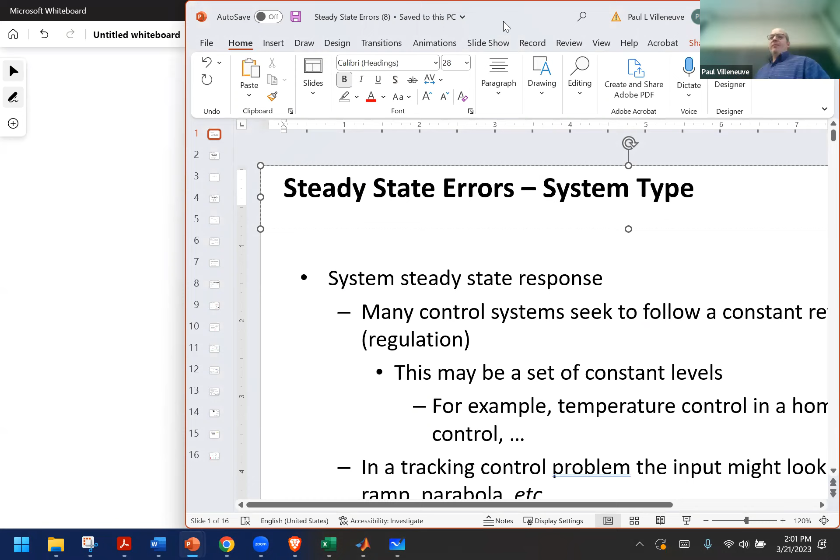Okay, should be available. All right, so any questions before we jump into new material? Everything on the test up to this point is covered, so anything from today forward is new content, new material. So any questions on anything?

I know we've had a boatload of homework. I've been trying to post the solutions, those are all available for the homework that's already due. Does anybody have any issues with that? Everybody hopefully knows where to find them at this point, in the content folder under homework solutions, I believe that's where that all is. The grading for the lab is a little slow, but hopefully we'll pick up and get that going pretty quickly.

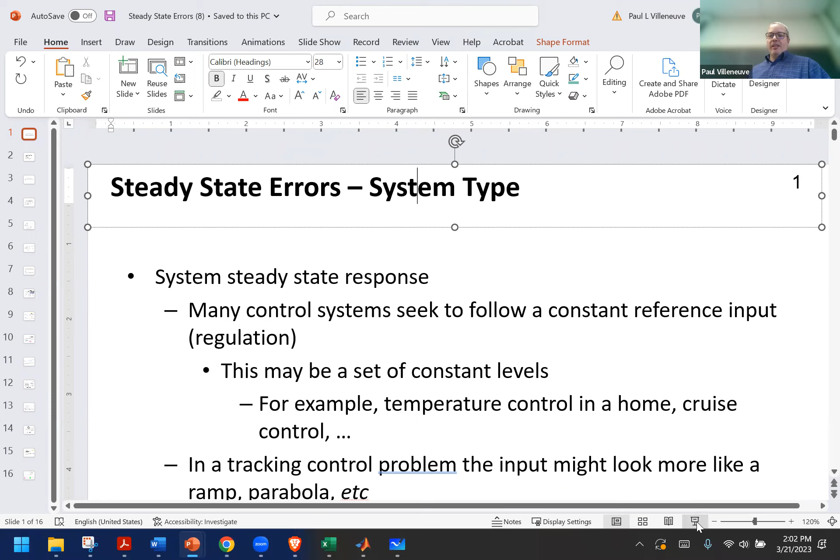So let's talk about steady state errors. Let me get this out of the way. I've said this I don't know how many times in this class, but we live in the time domain, but analyzing systems in the time domain can be quite difficult because we have to solve differential equations. So what we'd like to do is figure out time domain response, time domain expectations, time domain characteristics, whatever phrase you want to use, to get those results but not necessarily work in the time domain. One of the big things we have is our steady state response.

What is our final value going to be? A couple examples I came up with: what if you're coming up with a set point? A set point is what you desire, what you want to achieve. So if I want the temperature in this room to be 70 degrees, I set the thermostat to 70 degrees. There's a closed loop that will tell me if my temperature in the room is approximately 70 degrees. So does everybody understand the concept of deadband?

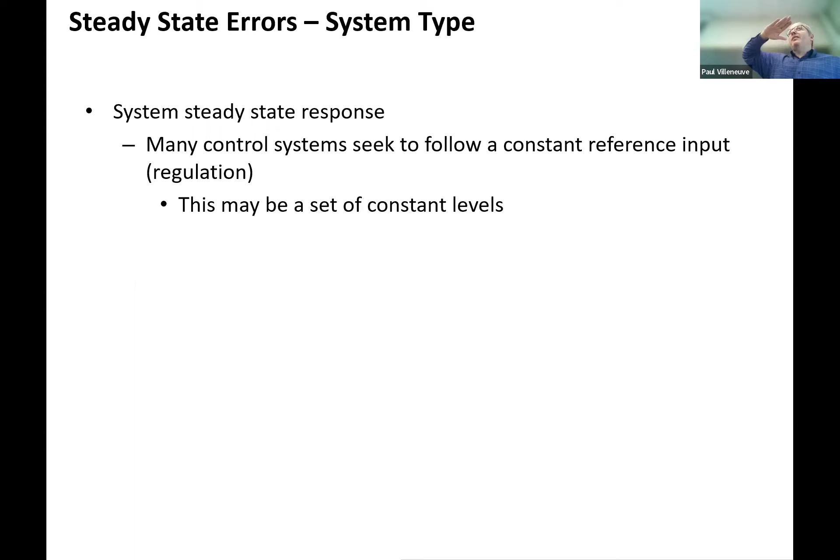You could never really get to a perfect 70-degree room temperature, because once it gets to 70 and shuts off, it's going to cool down and kick back on. So you'd be constantly chattering on, off, on, off. That's not practical. So the concept of deadband is: let's say I want it to be 70 degrees, if it's 70 degrees in the room, the heat could be on or off, we don't know that. So the concept of deadband is I have to know what's happening before that instant in time, if it's within the deadband zone. So 70 degrees is the ideal temperature, or the temperature I want, but the heat may be on or off.

It just depends. If the room was below, let's say my deadband is 2 degrees, if the room was below 69 degrees, the heat kicks on and raises the temperature until it gets to the end of the deadband, which is 71 degrees. Once it gets to 71 degrees, it kicks the heat off, so it goes back down. The temperature starts to drop again until it gets to 69, then it kicks on and goes off. So the deadband concept is the heat could be on or off between 69 and 71 degrees.

You don't know. It's dependent upon the previous state. So a deadband means I could be in either case. I don't know where the term dead comes from. I guess you could be alive or dead, maybe depending on your perspective of things.

The idea is that the concept of deadband is a control characteristic, because there are very few systems that have to be maintained at such a tight tolerance that they can't tolerate some change, especially if it's something that can't be held constant. Temperature is one, chemical properties are another, like alkalinity, especially since we lose or gain heat in this room all the time. So it's harder to control temperature, that's why you have that setup.

But that is a closed loop process, because our thermostat has a dial to indicate the temperature we desire, but we also have the ability to measure the temperature and look at the difference between those two. So we're not going to focus on this deadband concept, we're going to focus on achieving our ideal steady state value.

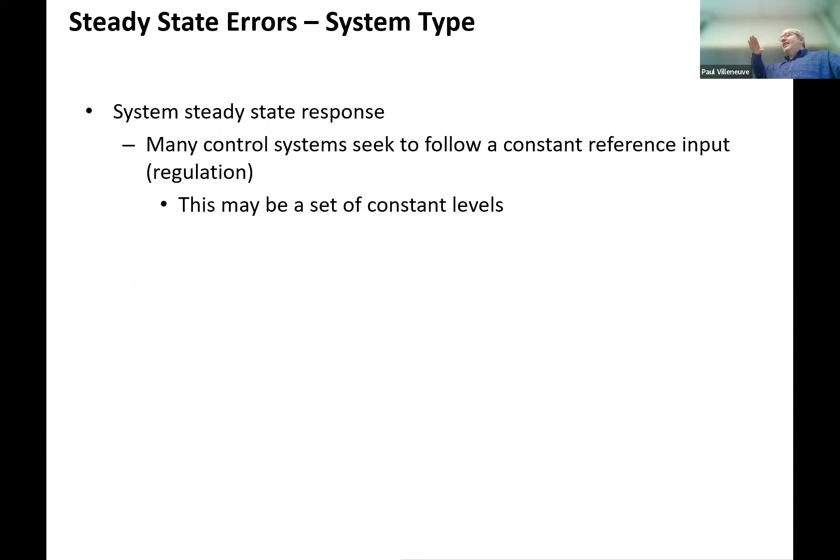Maybe it's a speed, a distance, or a level - any one of those constant levels. Level in a tank is one of the big things, level control in a tank, because we want to maintain that level at, let's say, 60% of nominal, 60% full. So that would be a case where we'd want to monitor as well as have a set point value for that. But that's not necessarily the only case where we have a fixed value.

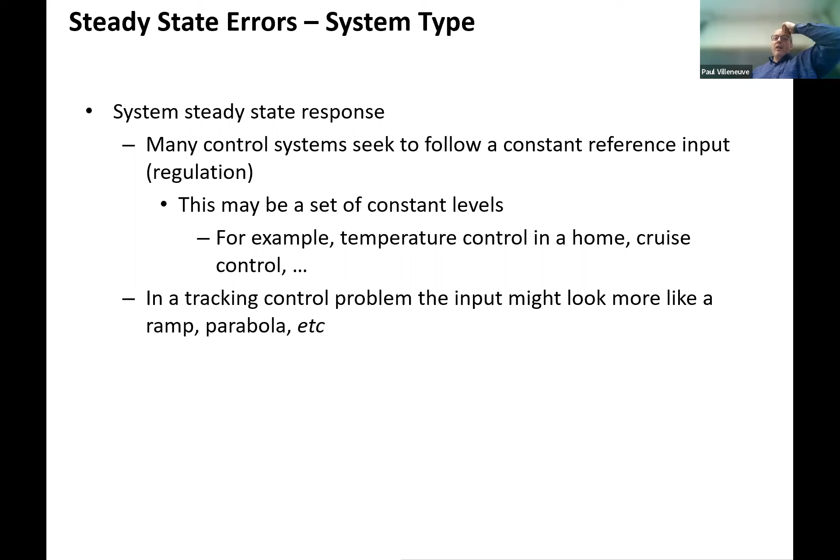Some of the harder ones are tracking. Let's say I want a car to be moving at a certain distance away at a fixed speed. So I can either set the speed, or the distance away will be increasing. If I have a robot, I want it to be 1 foot away, then a second later 2 feet away, 3 feet away, 4 feet, on and on. That would be a ramp characteristic. So I'm ramping my set point input, and my control is making the robot increase the distance that way. Maybe I can't monitor speed for some reason, but I can monitor distance, and at that point I'd be ramping it up.

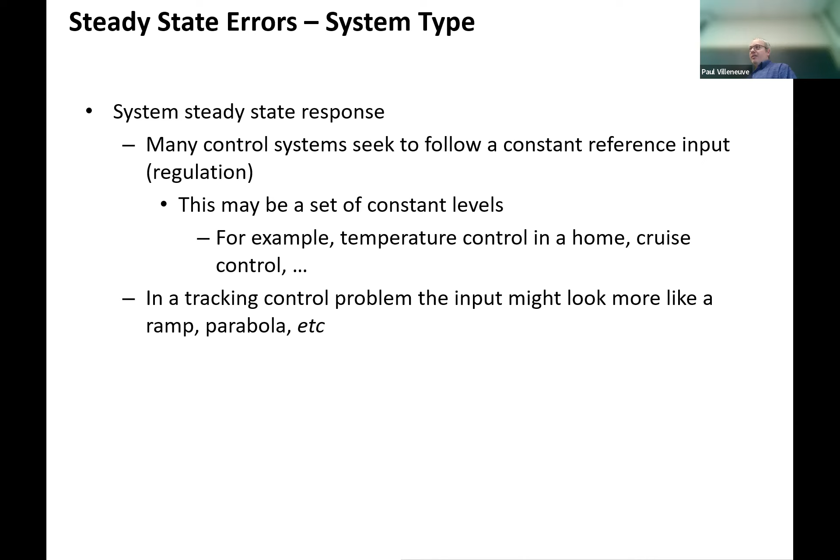Parabolic would be another one. Maybe I'm trying to accelerate something, so I want to continue to accelerate it, and at that point I need to increase it parabolically. That's a less common one, but the idea is that our inputs may not necessarily be a unit step, a unit ramp, or unit parabolic. I would like to have a controller design, or assess what the capability is of my system, by calculating the error for these different types of inputs: step, ramp, parabolic.

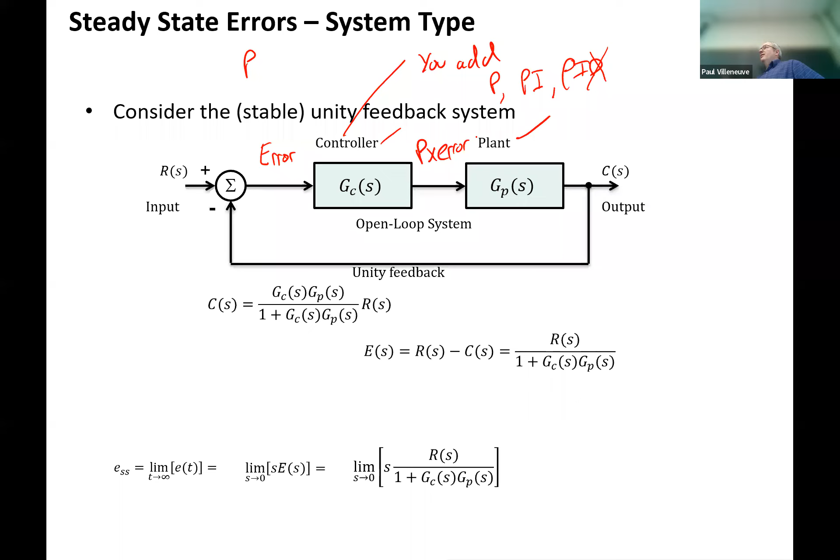So what do you do at that point? You start cheating, which is, I really want the temperature to be 70 degrees, but I only will get 68 degrees if I set it at 70. So what do you do? You turn it to 72 or 73 or 74. So you start kind of cheating your system a little bit to go ahead and get what your desired characteristics are.

And so that's where you get some plant familiarity. You're just the expert at your systems and you know how they function. So you tweak things. Normally this is the value that I want, but I got to dial it back, or I got to dial it up. So that's just becoming more familiar with the system.

So that works, but it is a dangerous precedent, because as we move more and more to digital control, the computers don't necessarily have that capability of remembering, hey, you need to set it 2 degrees above. That's what the operator would do. So you're better off to go ahead and design a system that can reduce that error to 0.

So by adding an integral, right? Remember, if this is my error signal, let's say it's a constant, the integrator here is going to increase until the error drops back down to 0, and then it stays flat.

So an integrator is basically a memory feature. It remembers I need to go ahead and keep that value output. So an integrator will remember that feature and will keep its output after the error has gone away. So you don't need any error with a proportional plus integral control because of that memory feature.

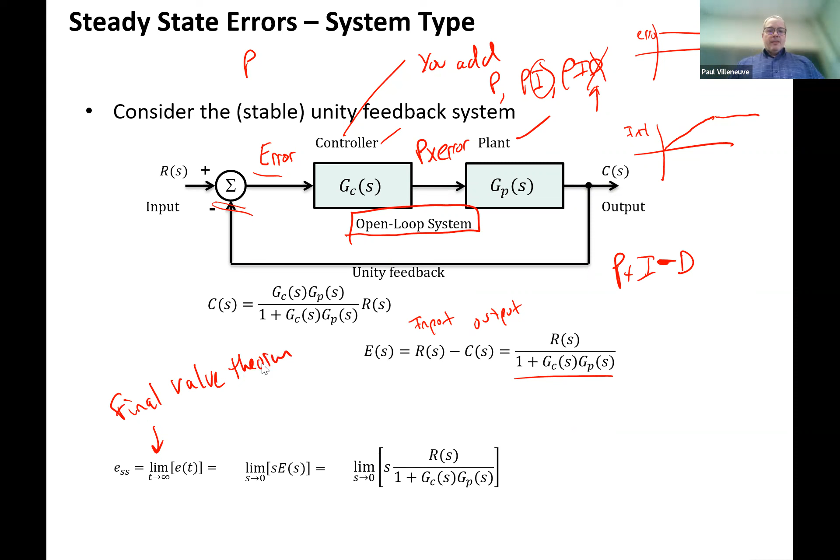Let's check and see if we can bring that up. Final value theorem. I want the final value, so I want to know what the final value of my error is. That's my steady state error. So the final value is a limit as that error function in the time domain, as time approaches infinity. Let's see if I can find it here. That's way more detailed than I want it to be. I just want a simple one. Here we go, right here.

So the final value, f of infinity, is equal to the limit as s approaches 0 times s times f of s. So whatever this function is in the Laplace domain, take my error function, my e of t, convert that into the Laplace domain, that becomes e of s, multiply that by s, and take my limit as s approaches 0, and that's my final value.

Okay, so I'm going to use the final value theorem to go ahead and get there. So here's my... whoops, why isn't this... it's a little slow today.

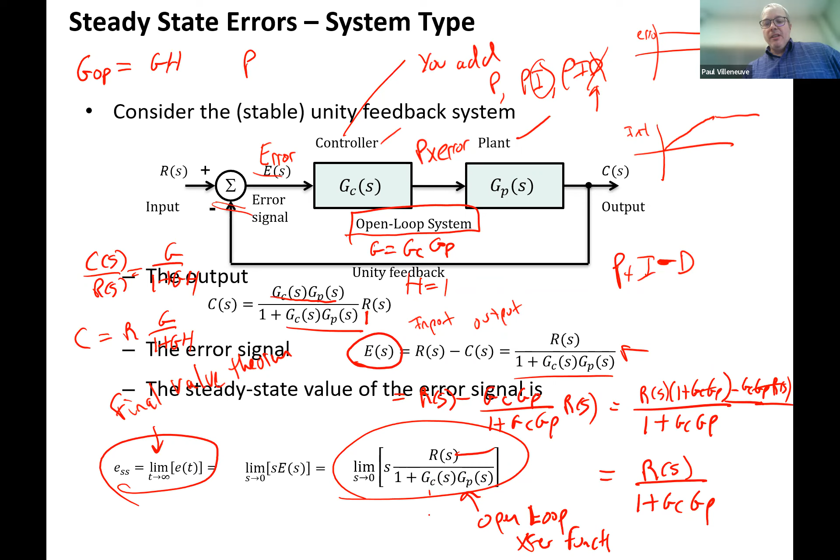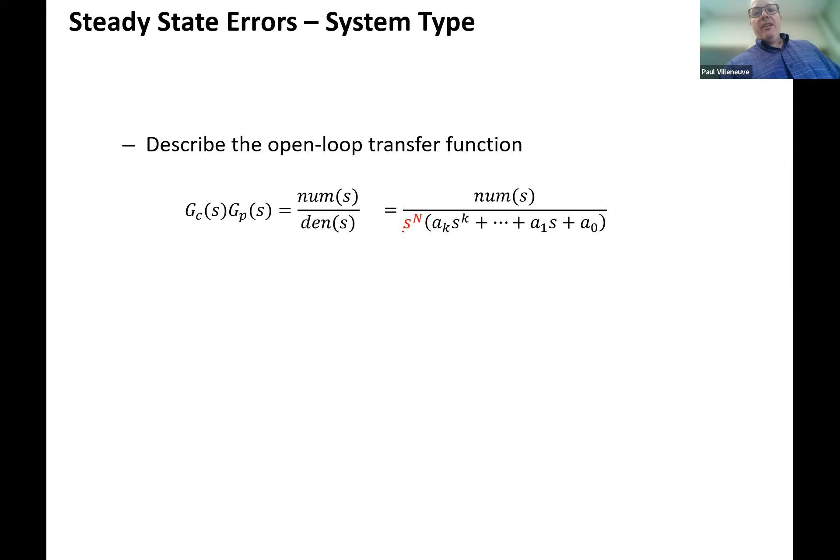Now let's look at how we can focus, because if you remember in our expression here, the only thing from the system that has S terms is right here, this GCGP term. So let's write that generically. It has a numerator and a denominator. I'm really only interested in the denominator, because that's our characteristic equation, and that's what's important to us.

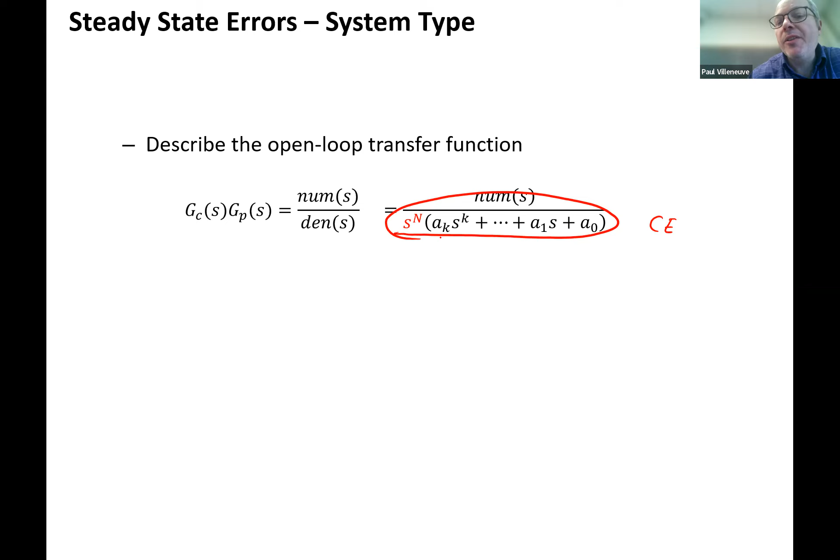So we factored this out so that we have all these coefficients here. We have an a to the 0, and then we have an s multiplier over here. This s to the n is equal to the number of zeros, or poles, I should say, at s equals 0.

It's also another really important thing. Let's look at n is equal to 1. So our numerator function is here, our denominator function is here with all those a's, and then this is s to the 1. Let's rewrite that as a numerator of s, and here's our denominator. But let's pull out over here 1 over s.

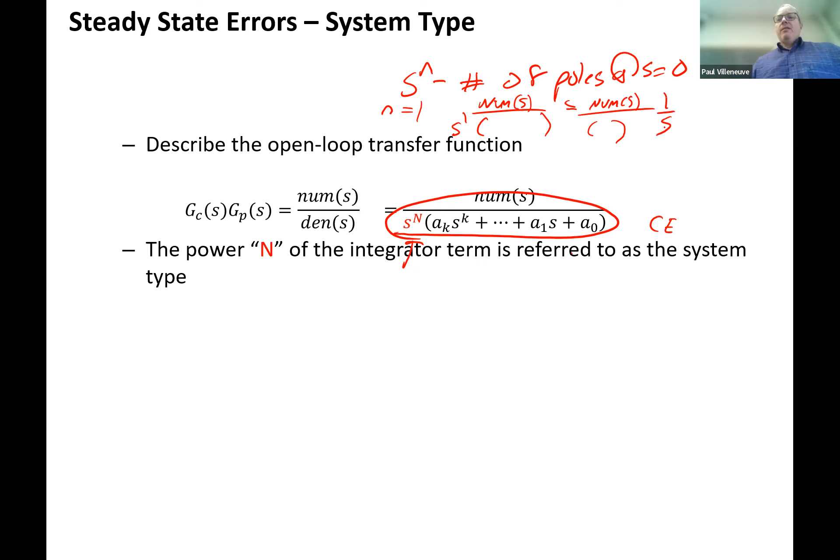What is 1 over s equivalent to in the time domain? Multiplication by 1 over s, that's a mathematical property. No, you're close, begins with an I. Integral. Yeah, 1 over s is an integral, isn't it? And we already talked about, if something has the ability to integrate, it can remember.

So it can take the system to 0. So not only is n the number of poles, but n is also equal to the number of system integrators, and that's so important to us. We say that the system type is equal to n. So if it's a type 1 system, that means it's got one integrator. If it's a type 2 system, it has two integrators. If it's a type 3 system, it has three integrators.

Now, does anybody have a hard time with me saying that a system has integrators? No real world system has an integrator, right? It's just a decaying exponential or sinusoidal waveform. Where do you get the integrators from? I gave you a hint earlier. What did we add into our block diagram? We had two blocks, one was the plant, what was the other one? The controller. So I can add more integration by just modifying my controller.

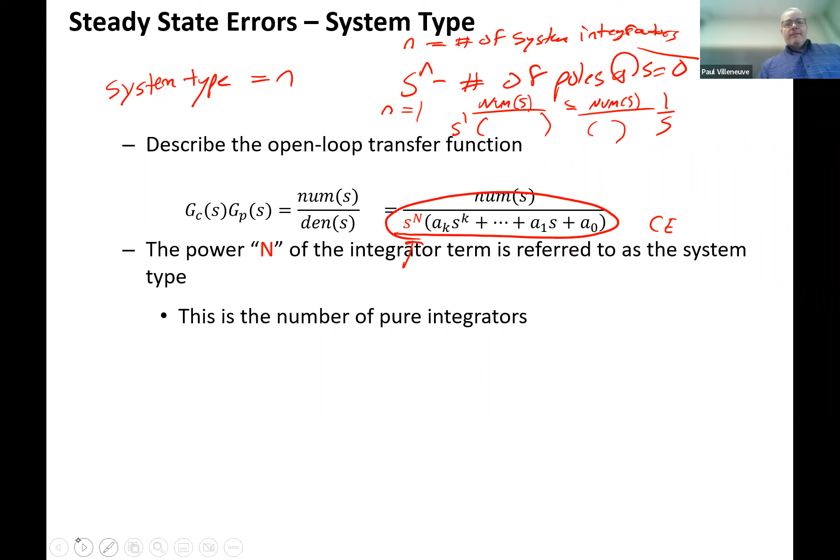So if I'm trying to keep up with a step, I only need one integrator. If I want to keep up with a ramp, I need two integrators. If I want to keep up with a parabolic, I need three integrators. So you get the integrators from the controller, not from the system. So that is a pure integrator, n is our pure integrator term.

Okay, so now let's go ahead and do some cases, because what we're going to do is see if we can simplify that ESS equation a little bit, if we can at all. So let's take the first case where we have an input of a unit step. As Moses said earlier, it's 1 over S. If it has some random multiplier value, like a 12-volt DC input, it becomes A over S. So we're going to plug in our unit step input and convert that to the Laplace domain so that R of S becomes A over S.

Now we're going to take the limit function. So our final value theorem is S times F of S. Here is our S, our F of S is A over S over 1 plus GC GP.

Well, what do you know? Those two will cancel, right?

What about this over here? No S terms in it, right? So I can move this limit over to here because I can change S all day and night, and it's still going to say 1, isn't it? It doesn't go away. It's always going to be 1. So I move my limit function over to my GC and GP, and now I'm going to come up with a new term.

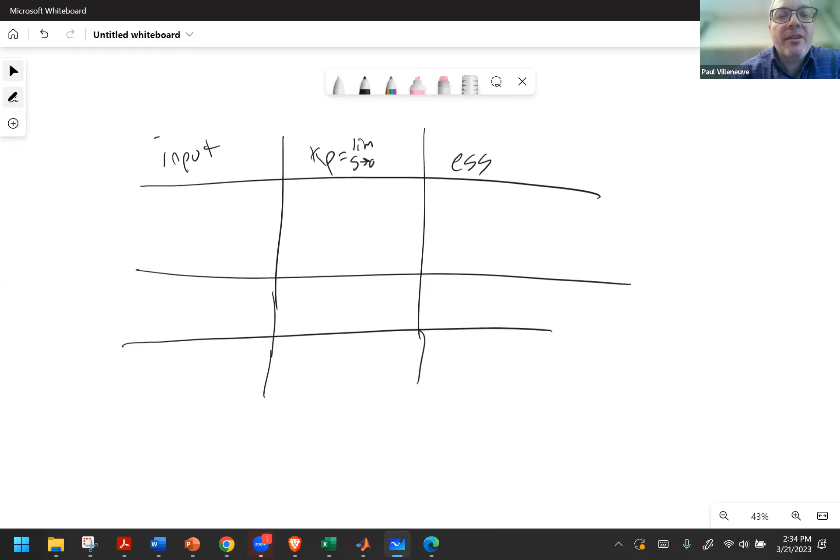GC times GP. My input for a step is going to be equal to—and let me see, do I want to put, and I've got to do a type system too, right? How do I want to do that? Am I trying to put too many dimensions here? I think my system type has to go over here. Let's put this on top. Let's see if this works.

Okay, so for a type 0 system for a step input, my K sub P is going to be equal to my limit as S approaches 0, GC, GP. My steady state error is going to be equal to some value, whatever my unit step input is, over 1 plus K sub P. Let's go to a type 1 system.

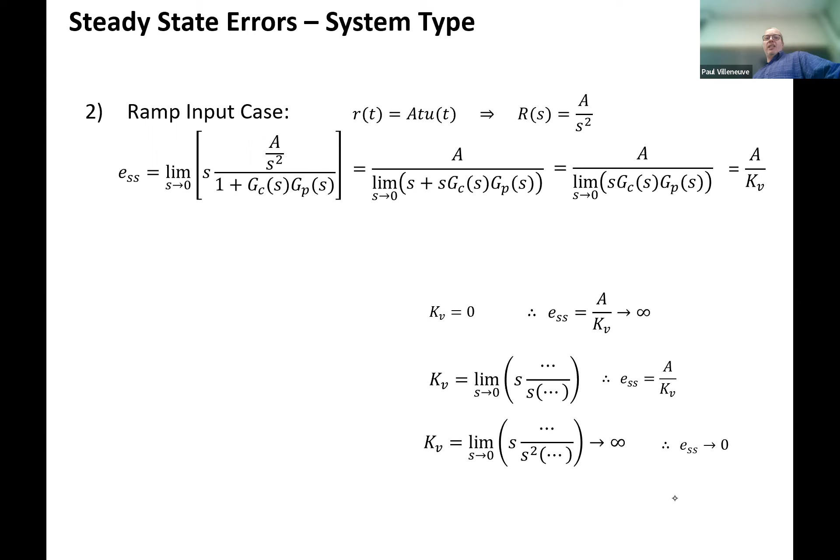Okay, so now let's plug that into our base equation, which is the limit as S approaches 0, S times my input, R of S, over 1 plus GC times GP. If I put my A over S squared in here and distribute it, well the first thing I see is that term goes away and that term becomes just an S, right? That S is multiplying the denominator, so I can move that here and multiply those terms. So that becomes S plus S times GC GP.

Now I'm going to move my limit over here because that's the only term that has any S functions. So I'm going to move it here. What happens to the limit, or what happens when I say limit as S approaches 0, S? What's that equal?

Zero. I'll give you a hint. The easiest way to do this, for me for doing limits, is actually plug in the number. Plug in 0 and see what happens. If you get goofy numbers like infinity, then you got to start looking at it as the number gets really, really small. But for most cases, if you just plug in the number, it usually works its way out, so you don't have to think about it all that hard.

So 0, this term goes away. So all I'm left with is A over the limit S times GC GP. Well, let's take a look at this.

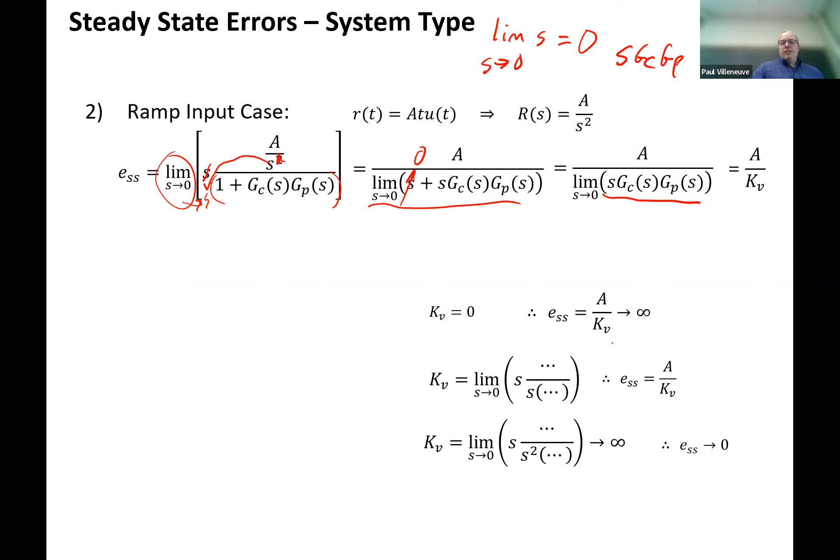SGC GP. Have we ever seen a GC GP term? If we look over here, our K sub P term looks pretty close to it. It's GC GP.

When I multiply S times K sub P, or my position error, and I multiply it by S, what would be another way to say that? Multiply K sub P times S. Multiply the position times S.

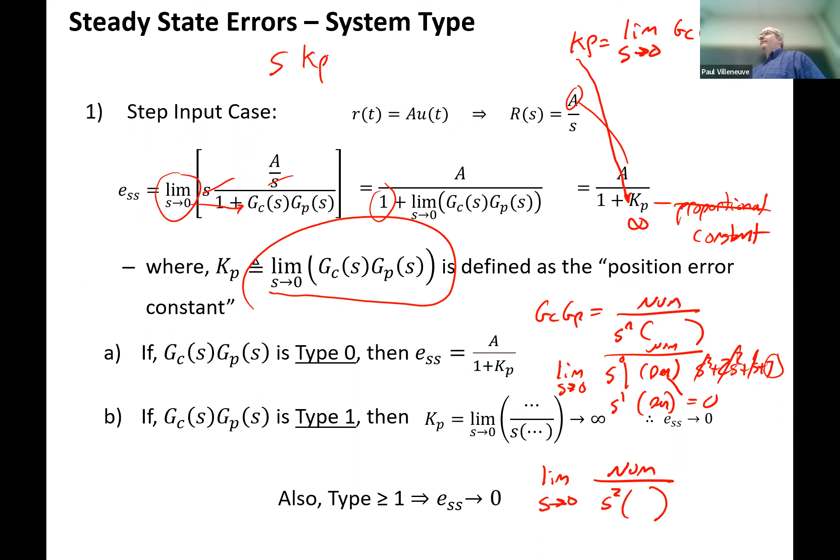What is multiplication by S in the Laplace domain equivalent to? Taking the derivative. If I take the derivative of position, what do I get? Velocity.

So the K sub V. K sub V is my velocity constant, or velocity error constant. Because I'm taking S, taking my position constant, taking the derivative of it by multiplying by S, I get my velocity constant. So I'm going to have K sub V, and here's my expression: S GC GP, it's my velocity error.

Now let's go back to our systems. Let's take a look at this here in the whiteboard. Oh, right here. Oh, it's not awake. Why isn't this moving? Oh, sorry folks, it looks like whiteboard has crashed.

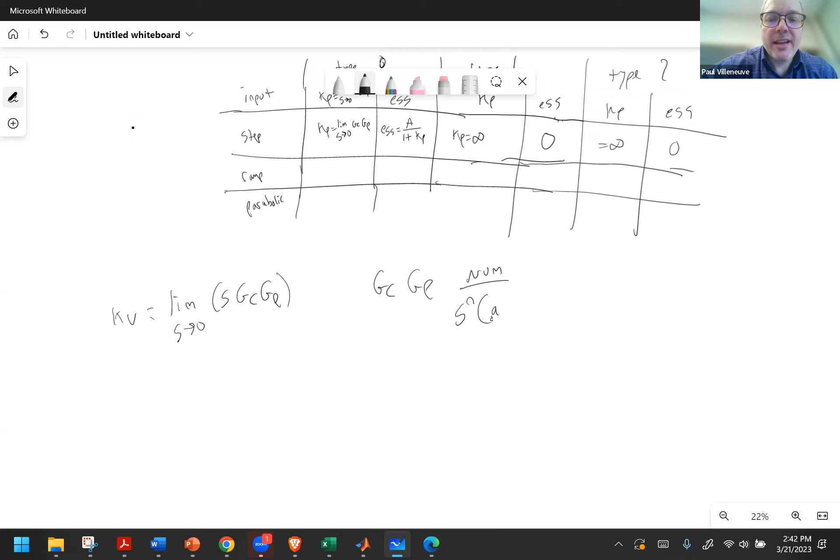All right, so we said K sub V is equal to the limit as S approaches 0 of S GC GP, right? And we already said that GC GP has a numerator over some S to the N times my, well, let's write it out as an expression: A0 S to the N minus 1, etc., all the way down to A to the N, but no S terms.

So let's start off with a type 0 system. For a type 0 system, my GC GP is going to be equal to S to the 0 over A0 S to the N minus 1 all the way down to AN. That's equal to my numerator over, and this becomes a 1, right? S to the 0 is just a 1 term.

So what do we get when we have a type 0 system? We would have a number over A sub N, right? But remember, this is multiplying by S, correct? So for a type 0 system, that's our value, but where we have S multiplying our numerator over S times A0 S to the N minus 1 plus all the way to the N, that's going to be equal to S times my numerator over A to the N, correct?

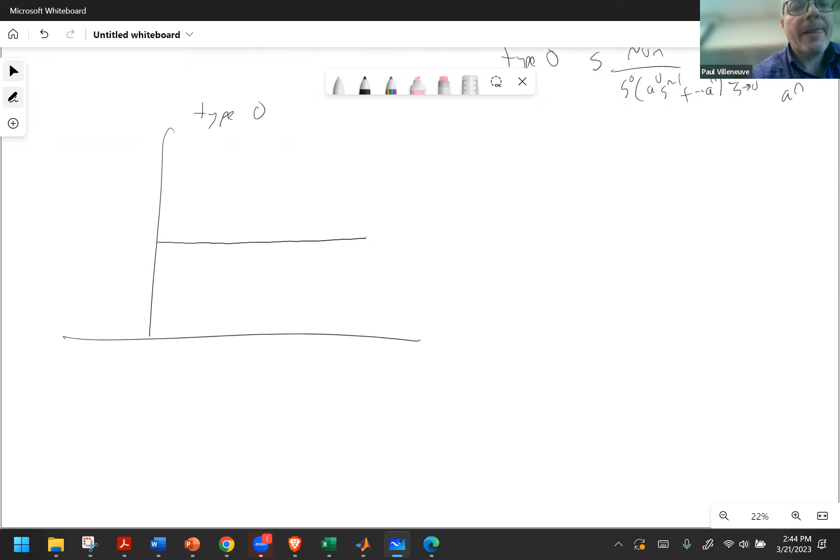If I was to draw that graphically, here's my plot. So if I have an input over here, if I have a type 0 system, I have something like this, right? And then over time, here's my error, E steady state. This is the difference between the two, for a type 0 system.

If it's a type 1 system, I end up doing something like this, and I might overshoot, but eventually it'll balance out, it'll be the same value. So there'll be no steady state error.

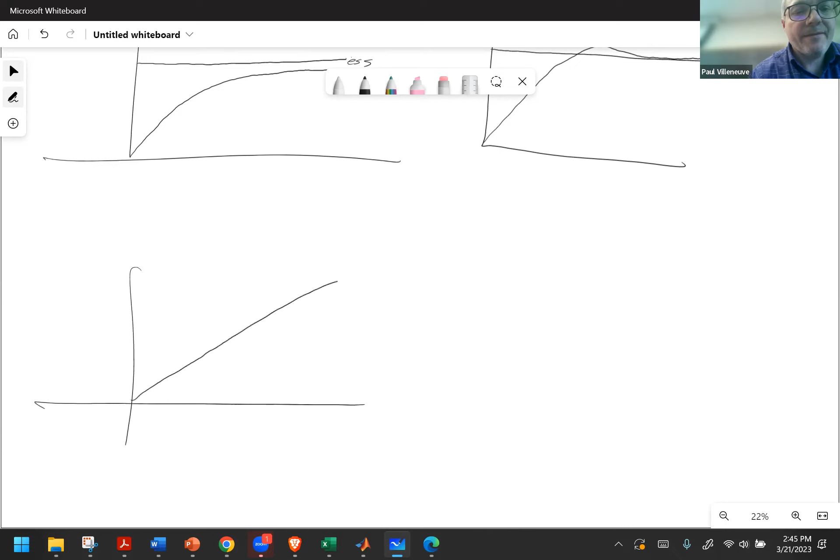Now let's look at the case for a ramp. A ramp is doing this, right? So for a type 0 system, that's not like that — its characteristic doesn't change. So with a type 0 system, as this continues to increase, this stays constant. So the error between those two just continues to grow and grow and grow. That's why the steady state error is infinite, because as time t approaches infinity, that ramp approaches infinity, but the type 0 system just stabilizes out to a value.

But a type 1 system is doing this, and then it's ringing, and it can continue, but it basically will have a constant error between the two.

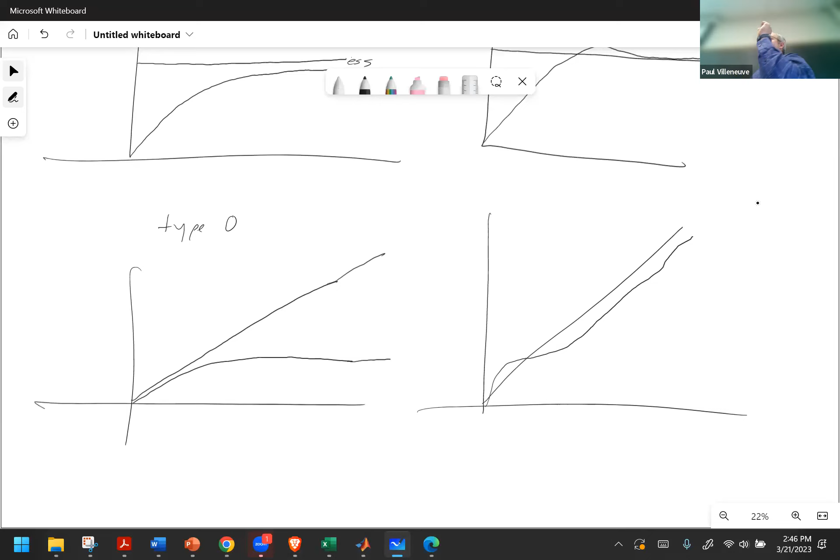So for a type 1 system, we have S to the 1 in our GC/GP term. Those S terms will cancel. Remember that S we had? We just had it in the numerator. As S approached 0, it forced the whole thing to 0. Now that gets canceled out.

And so now what we're left with is we have that A over the A to the N term. That is not a 0 number, so my steady state error is non-zero.

If I go to a type 2 system, this cancels out, and this becomes a 1 as my limit function approaches 0. Anything divided by s as it approaches 0 becomes infinity, so my K sub V term approaches infinity, and my steady state error approaches 0. So for a unit ramp input, I need a type 2 system to get to 0. Let's go back and append to this table.

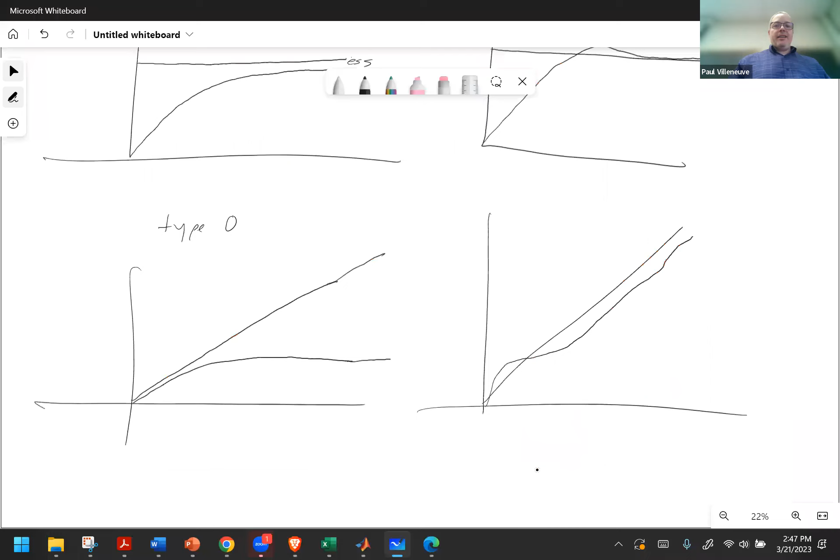Now for a ramp input, I'm not even going to care about K sub P, I'm only interested in K sub V, because K sub P is the position constant, the one I define for a step input. For a ramp, I'm interested in K sub V, which is equal to the limit as s approaches 0 of s, GC, GP. We've already said that's going to be equal to 0. My ESS is equal to A over K sub V, which is equal to infinity.

So for a type 0 system, I'm definitely going to get a value that doesn't work out for me. For a type 1 system, my K sub V term is going to be equal to the limit as s approaches 0 of s, GC, GP. But remember, GC GP has one s in the denominator, so that cancels out, and that's going to be an actual number, equal to GC times GP, all those terms will cancel out. I have no integrators — I should include that here so we don't forget to clear it out. So that is not a 0 now, that is an actual value you have to calculate.

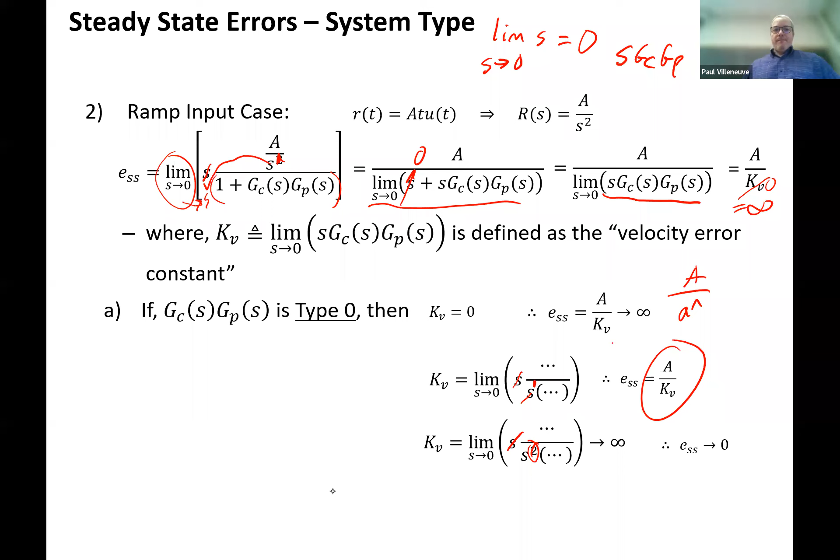Okay, so the last one, which is parabolic. The parabolic is something that is increasing exponentially. So a step input was a constant, a ramp input is the integral. A step is a constant A, a ramp is the integral of a step, which is AT, and a parabolic is the integral of a ramp, which is AT squared.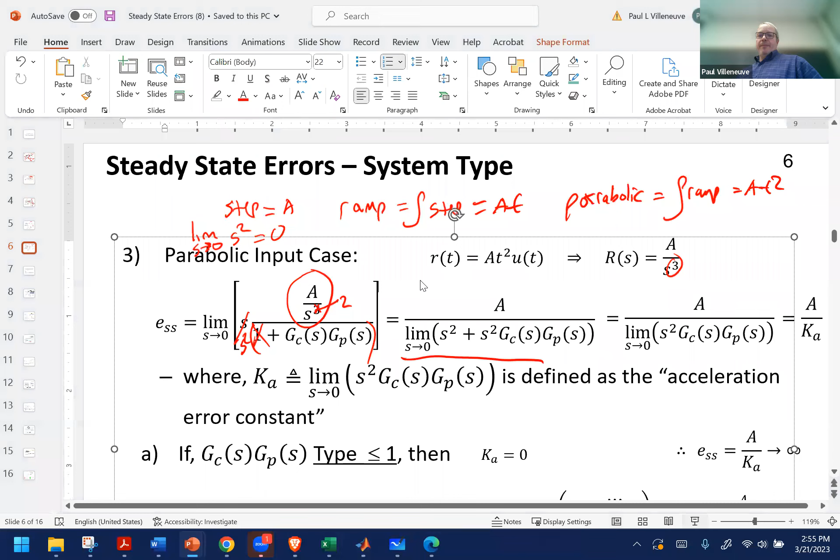Okay, so I just needed to scale it up. There, okay, sorry about the typo. But you can see how the s squared cancels for the first term because of the limit function.

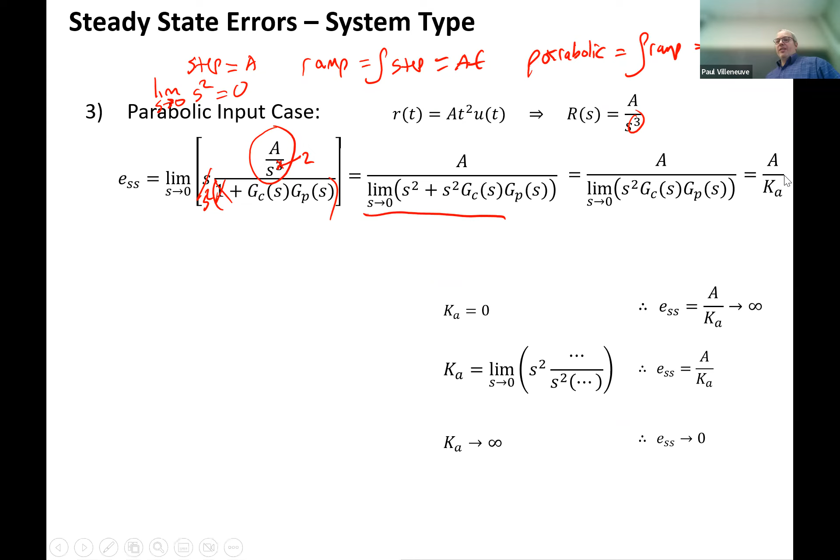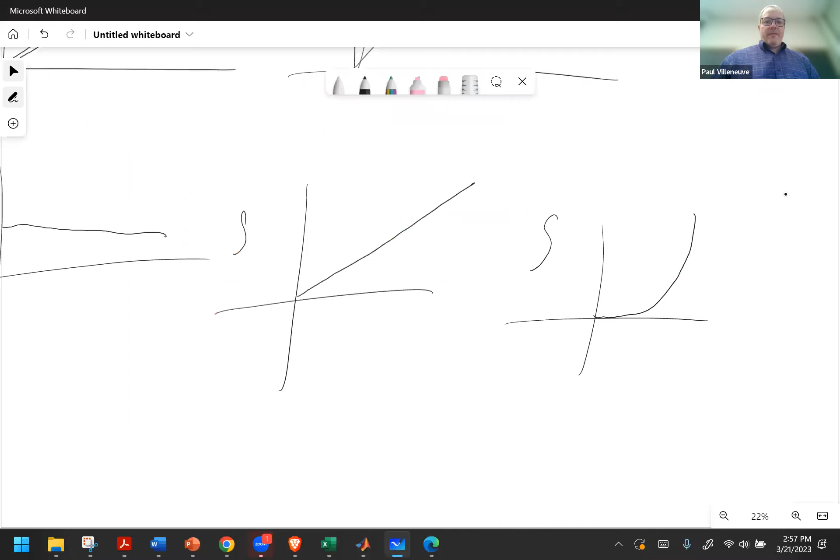So now we have our Ka term, which we're only interested in if our input is a parabolic. For the other terms we don't care about it because we don't have to keep up with it. It's not something that's continuing to accelerate, right? So if you think about it, the position doesn't accelerate, it stays constant, so we're only interested in position. In a ramp, it's continuing to increase its position, so it's got velocity, so we're interested in the velocity constant. In acceleration, or in a parabolic, it's continuing to increase its position, not just the position, but the rate of the position change - that's the acceleration. So we're interested in Ka.

So Ka is equal to the limit as s approaches 0, s squared GC GP. So let's do the type 0 system. Let's do the limit as s approaches 0, s squared, some numerator over s to the 0 times my denominator. Well, this is just a 1.

This term is always going to be equal to 0. Limit as s approaches 0, s squared is always going to be 0, so that makes that term go to 0. So for a type 0 system, this k sub a is going to be equal to 0. My steady state error, which is equal to a over k sub a, is equal to infinity. So for a type 0 system, we have infinite error because we have no integrators to help us.

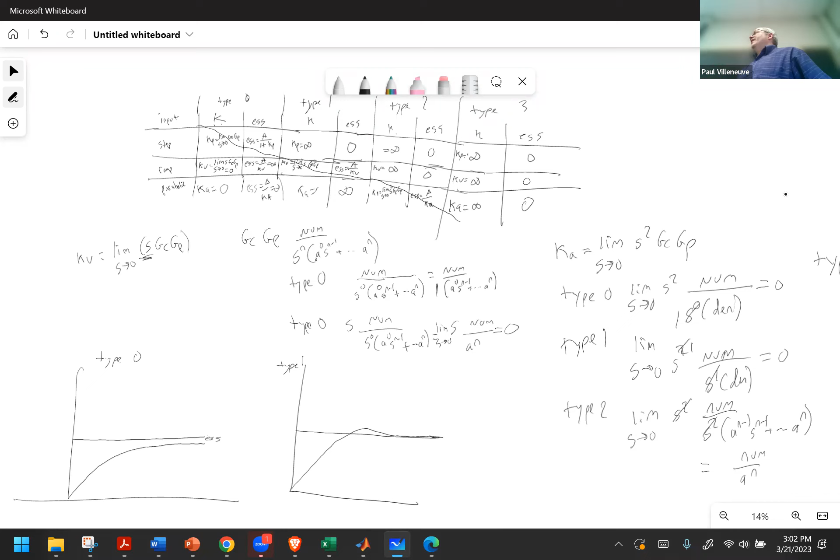Okay, so I'll try to highlight this as best as I can, but you kind of follow the diagonal here. See if I can follow the diagonal. So that's kind of the dividing line. That center line, if that is the system type based on the input, you get values. Anything to the right of that, you get no errors, right? Steady state error 0. Anything to the left of that, you get infinite. And that's how that table divides.

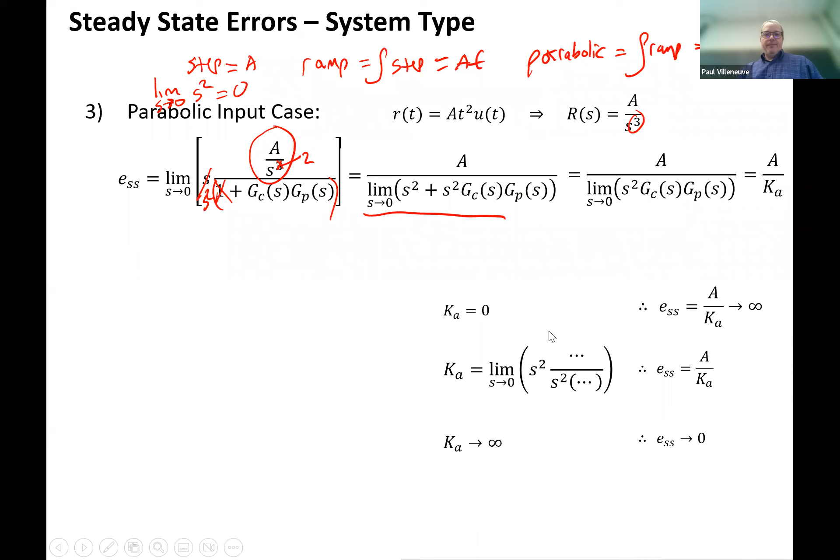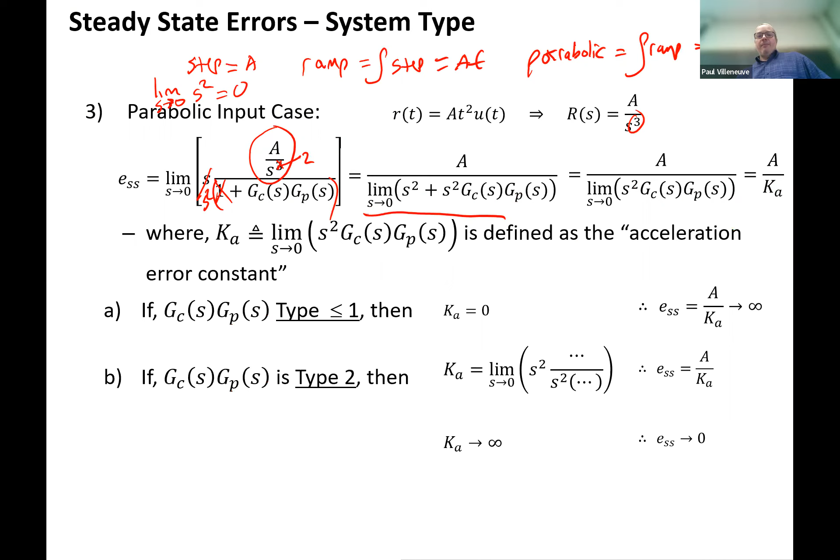All right, we'll finish up with this because I'm drying out rapidly. My lips are on fire.

So we're doing it with the closed loop system. So this is a closed loop system that we're analyzing because the error is closed, but we're actually looking at the system type for the open loop. It's just GC, or the feed forward gain, and the feedback gain. So G closed loop is G over 1 plus GH. G open loop is just equal to GH. So essentially, that is my open loop gain.

All right, if you get confused, I always do my summing junction here. And I just do 1G here, 1H, and then I open loop this. So this is my R, and let's call this my C. So what would be the open loop gain? I can see to get to point C, that's equal to R times GH. So my transfer function for C over R is equal to GH, right? So that's the reason why we call it open loop gain.

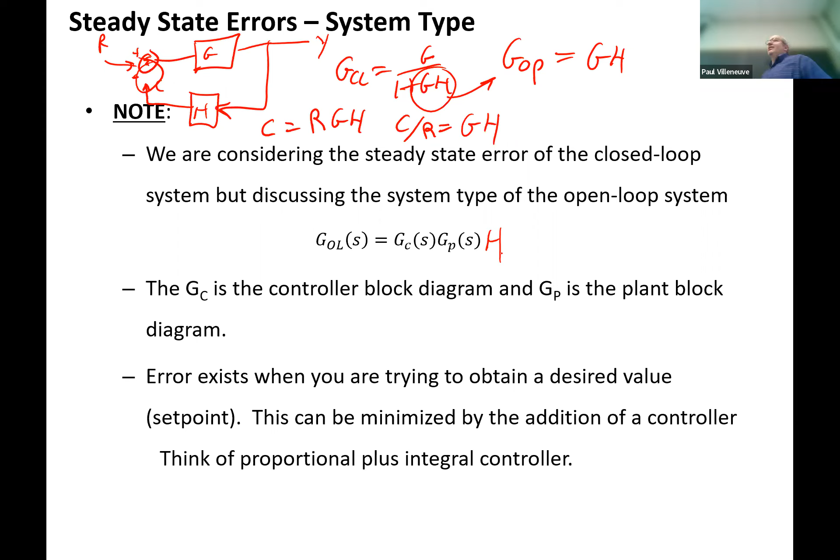The reason why I teach the stuff with the different system types for the different inputs, is because if you look at the FE review manual, it has a table for type 0, type 1, type 2. It has all those and those proportional constants. So it doesn't take a lot of additional work to go ahead and explain the error of the system type stuff.

And let's just look real quick to see. Let's see if we can actually, I don't want to review course. I just want to see the.

Oh, we might have to have a... I don't think I have a login, but I was just looking for the electrical one. I don't want to download anything illegally.

But take a look, if you set up an account, that would be smart for you, because I think all of you are required to take the FE. Go to the exam review material. Let's see, what does this say? Reference handbook. Yeah, you got to buy it, but you can download it for free.

Well, would you feel comfortable sharing your screen? That's what I'm saying, share your screen in Zoom. Oh, you're not in Zoom. Oh yeah, if you want to email it to me, that'd be great. I just don't want to download anything and get anybody in trouble.

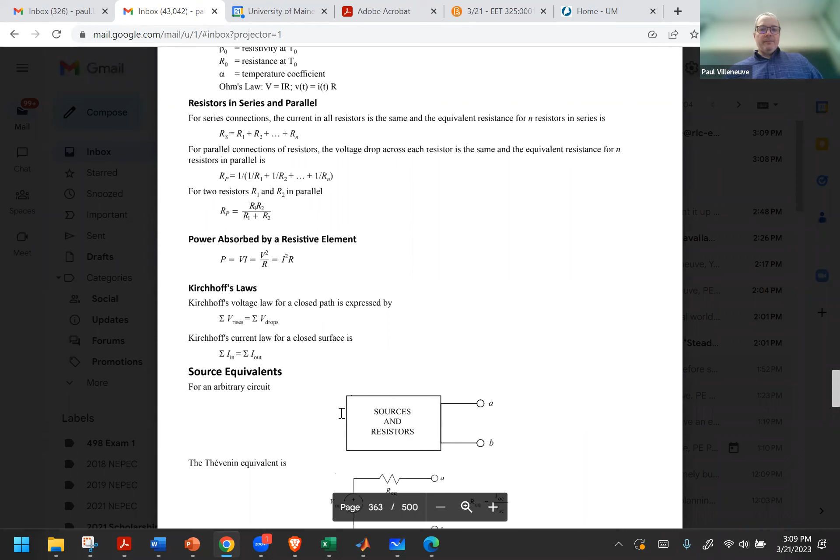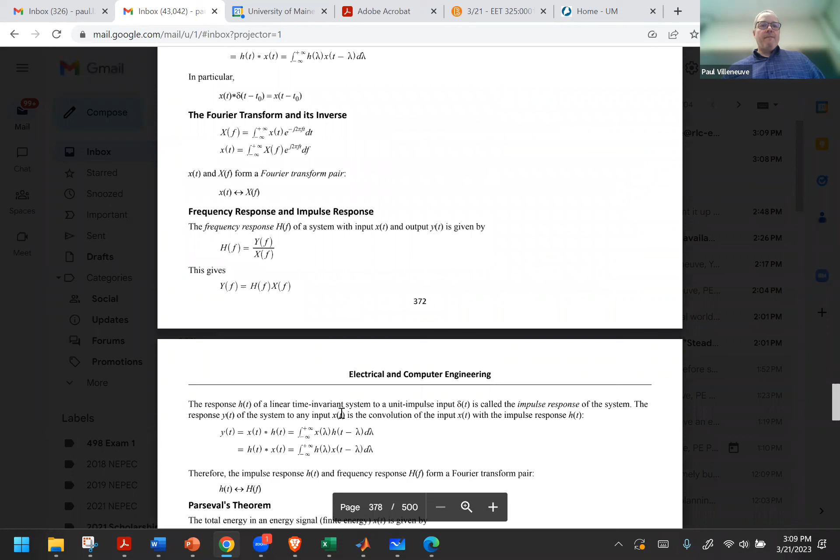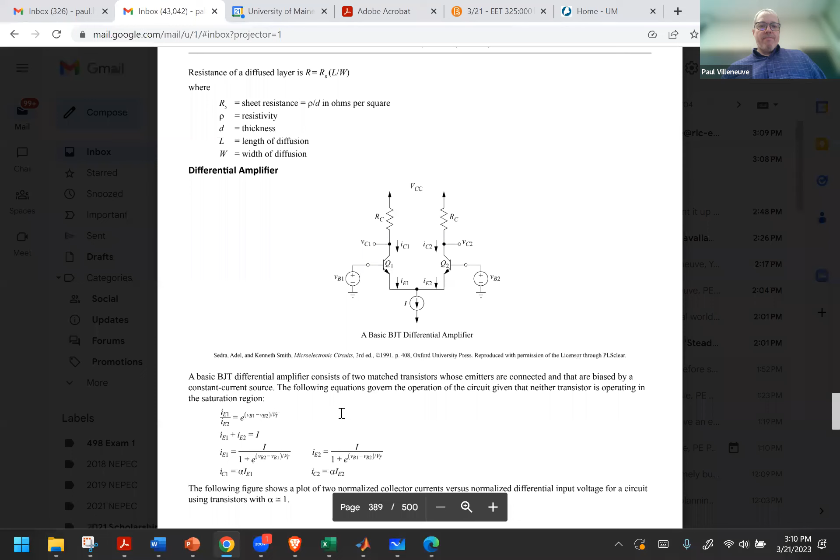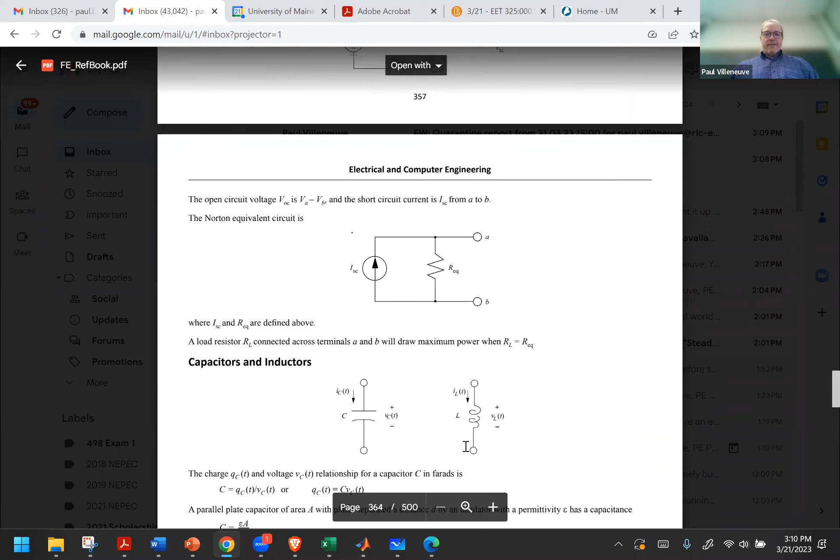Let's look in the controls section. So electrical and computer engineering, voltage regulation. Where's the controls stuff? They used to have just a one, it was like 80 pages or something like that, where. What page is that? 225. Okay, there you go.

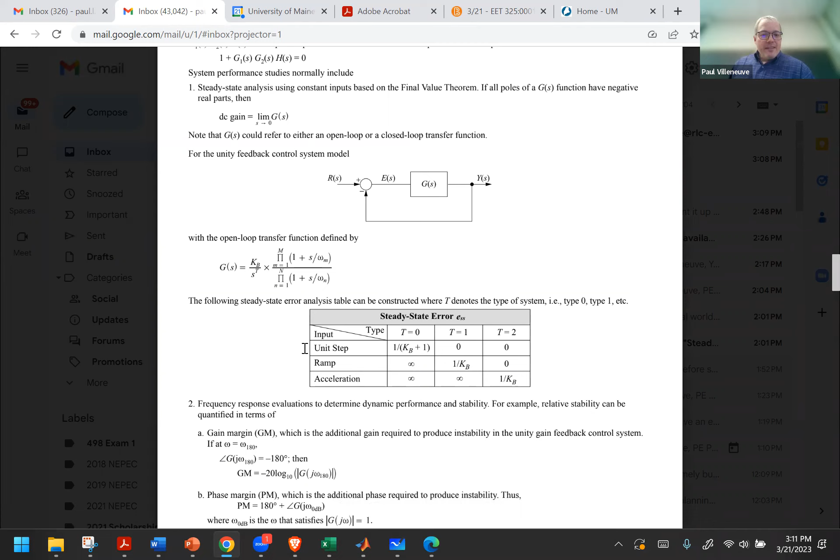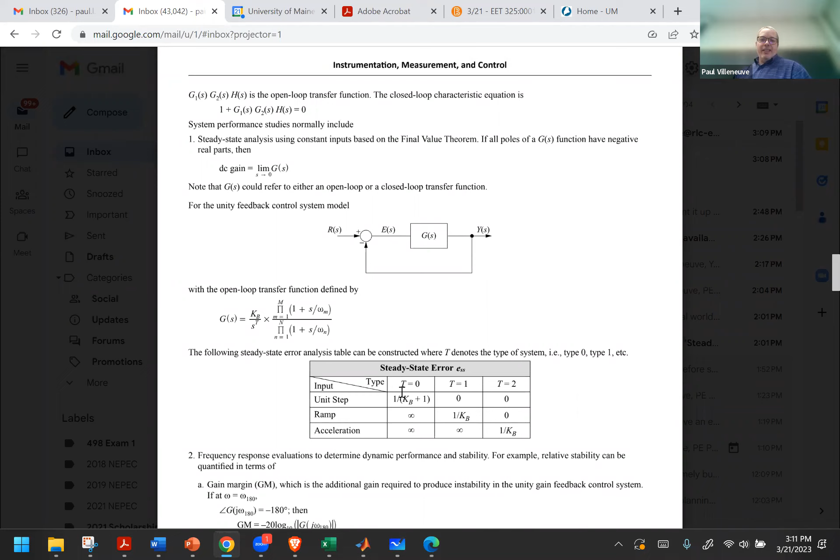So that's the reason why I cover those other systems, because again, in EET we probably won't do it, but you can see unit step, they call it K sub B. The K sub B doesn't appear that they even show you how to calculate that, so unless it's up above here. Yeah, they don't even show you, they just give you K sub B. So K sub B for that. So they're missing a little bit of information, but you can see system type 0, 1, 2. If you go on and on, you just put zeros here. But unit step, ramp, or parabolic, this is not K sub B. That's the limit as S approaches 0, S squared GC GP. This is the limit as S approaches 0, S times GC GP. In this K sub B, this is a different value. So they're missing some information, but that's the reason why we just put the other systems in there, because if you can do this really quickly, this is 4 or 5 points, pretty easy on the FE. It's a pretty simple question.

Okay, well thanks for sharing that, Moses, and thanks for trying to share that, Mort. Any questions? Yep.

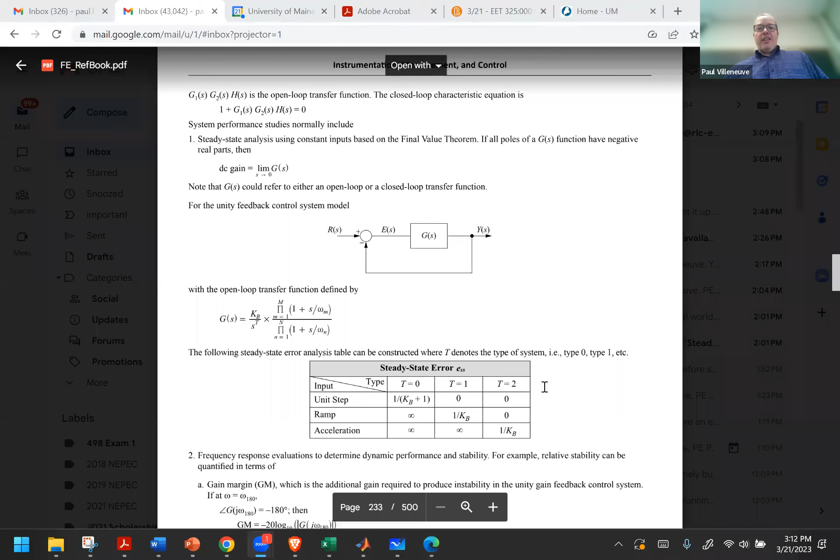Yeah, so if you know your system type, well let me back up. If you know what your input is going to be, if you're trying to control to a fixed input, then you want one integrator. If you want to control to a ramp input, you need a system type 1 to have a chance.

Right, yeah, it's very rare that a system has an integrator built into it. That'd be pretty unheard of. Most of them are first order processes, second order processes that have exponential decay. It's highly unlikely that you'll find one that way. So I would just say, all right, I need a controller that's going to be able to handle a ramp input. Then I know I need, if I'm willing to tolerate some error, that's just the ammonia tank. I think it's ammonia or hydrogen blowing, letting out some pressure. That happens every once in a while. But you would use that here. If you want it to be 0, then you need a type 2.